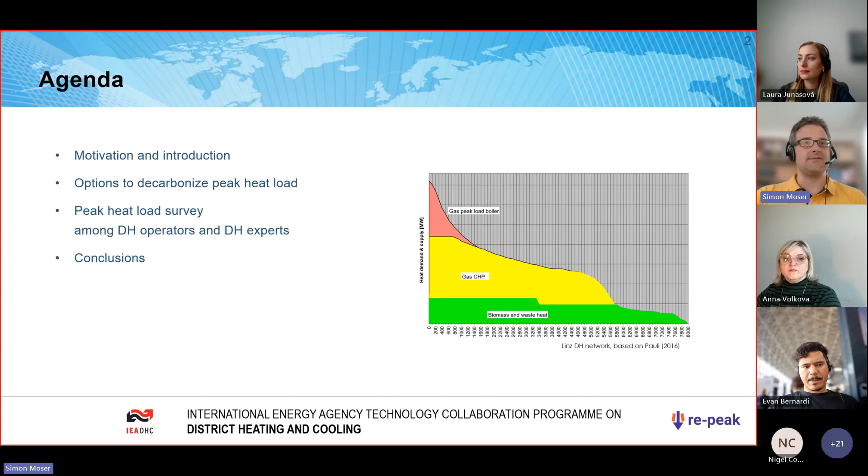REPEAK is a project that we performed in the context of IEA DHC Annex 14, and the long title is How to Cover Peak Heat Loads in District Heating Networks with Renewables. Here is a short agenda for the next 25 minutes. I will start with a brief motivation and introduction to the project. Then Anna will talk about the options to decarbonize peak heat loads, and then I will be back again and present on the survey among district heating operators and district heating experts and what we found out there.

Okay, for a brief introduction to the project. We know that many district heating networks already have incorporated CO2 neutral alternatives. Nevertheless, especially when you talk about decarbonization, it always seems like the focus is especially on the base load, while the rest is covered by gas.

So we had more or less two hypotheses, and one was that addressing peak heat loads is a major challenge for district heating networks because on the one hand, today they still primarily rely on fossil gas and oil, and on the other hand, it is about peak heat load capacity, which means that it's not for a large quantity of heat that is produced, but a large capacity that must be provided to really fulfill the heating requirements.

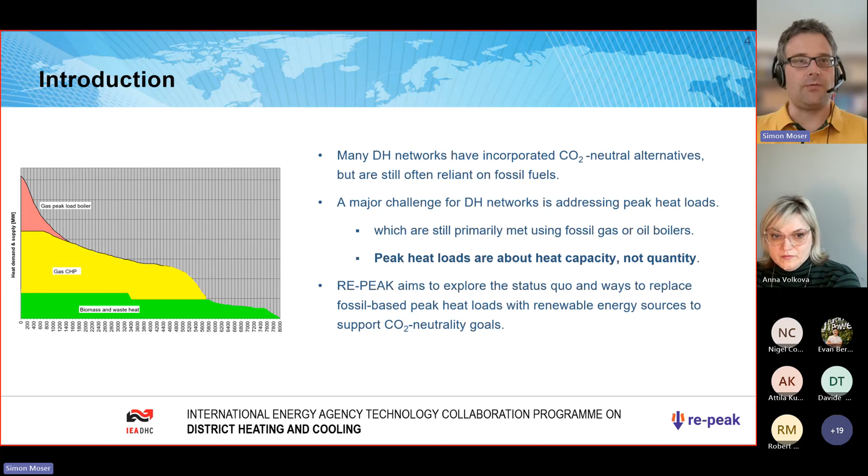And so REPEAK aims to explore the status today on the one hand and really derive what options are available for future peak heat load provision. So we have put up some hypotheses in the beginning, and these are also derived from a previous project that we have run, and they found, so to say, their way into the proposal.

And one hypothesis is that peak heat load lacks a precise definition, that peak heat loads are currently mainly provided by fossil technologies. Net zero provision of peak heat loads is not yet in the focus of district heating networks, and green gas is in the focus using the same technological basis, so green gas boilers then.

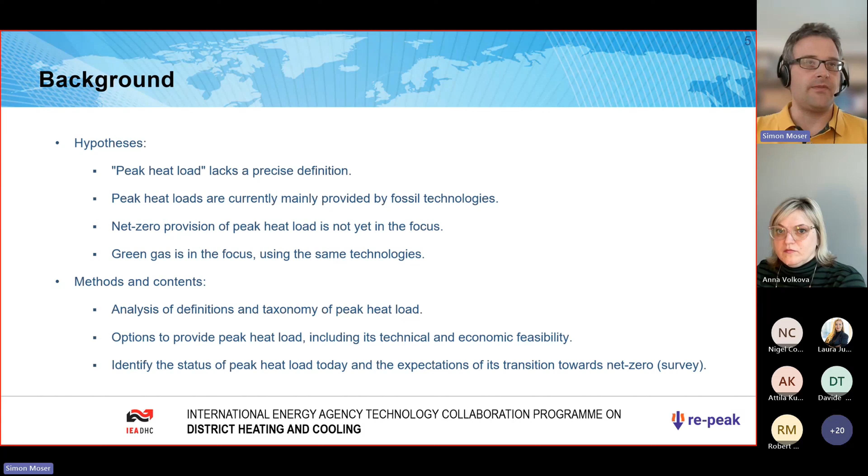What did we do, and what will you see in the following is the following methods and contents. We tried to analyze the definitions and the taxonomy of peak heat loads. We looked at the options to provide peak heat loads. That is what Anna will present, including the technical and economic feasibility. And then we identify the status of peak heat loads and the expectations towards the transition in direction of net zero from the survey that we performed.

This is done by the best project team suited for that, and this is Energieinstitut at Johannes Kepler University in Linz, Tallinn University of Technology, TalTech, and Euroheat and Power as a dissemination and promotion partner. The project is funded by IEA DHC within this Annex 14 call for proposals and runs since November 2023 and should come to an end rather soon in the next month.

And herewith I hand over to Anna, please. Yes, thank you. I will share my continuation of presentation. Just a moment. Yes. Just a moment. Do you see it now, or you see my screen? You see Teams? We see the Teams. Okay. Just a moment. This way. You should see screen. Perfect, now. Yes. But I will look a little bit to another direction now.

Dear colleagues, I'm very glad to participate in this meeting, and we'll continue with the presentation of results of our RE-PEAK project. And our task as partners was to develop a taxonomy of peak heat load. And when we started to work with this topic, with peak heat load of district heating, we understood that actually this topic is not so simple, and both definition and classification need to be analyzed, and that's why taxonomy as a method has been used to make this review analysis.

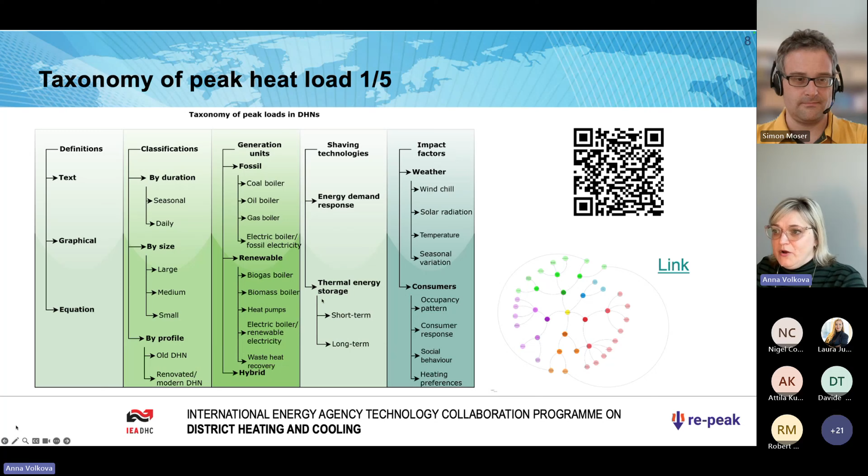So we started with definitions, and if you would speak with any district heating expert and ask what peak heat load means, first the expert will start drawing in the air or on paper.

So for sure, one possibility to define district heating peak heat load is a graphical definition, and here you can see examples. For sure, a text definition as maximum heat demand during a specific period, and another way of presenting what peak heat load means is with mathematical approaches using equations.

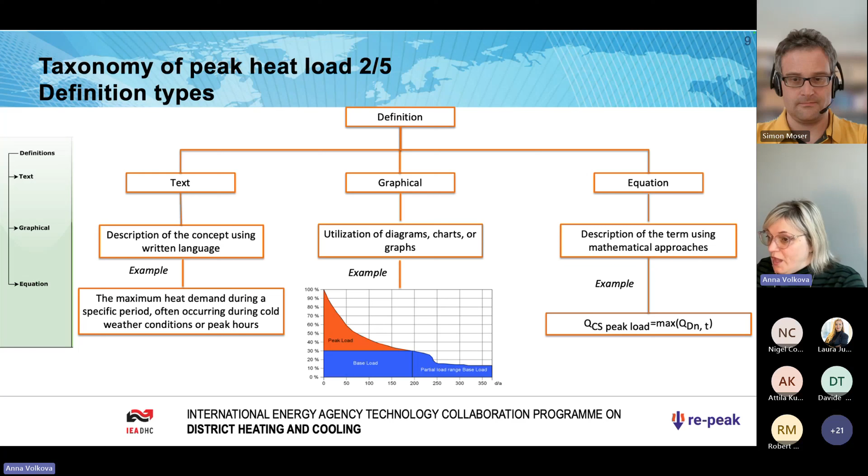So the main part of the taxonomy is categorization or classification, and we use classification and categorization by duration. So how long is the time when we have peak heat load in the district heating network? It can be daily or seasonal peak heat load. How frequently peak heat load occurs.

Another criterion for categorization is size of peak heat load, both if we look at the share of peak heat load in the district heating system, and another possibility is to look at the size of the district heating network. Small, medium, and large, and depending on need, the peak heat load profile can be different.

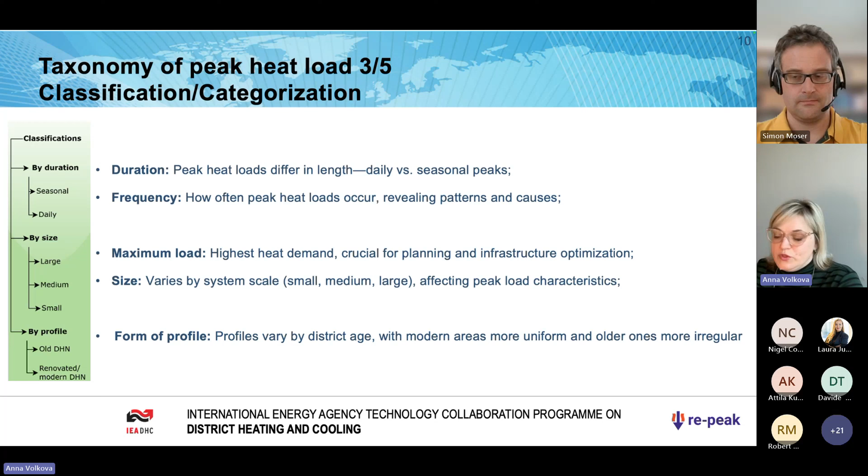And for sure, the form of the profile for the whole heat load duration curve influences the peak heat load profile, and it is different depending on the energy efficiency of the district heating network and the energy efficiency of consumers which are connected to this district heating network.

So what we added to the taxonomy was shaving technologies, including demand side management, thermal energy storage, and impacting factors, which for sure are related to forecasting of heat demand during all the year, but extremely important when we analyze peak heat load. And these can be found in our taxonomy.

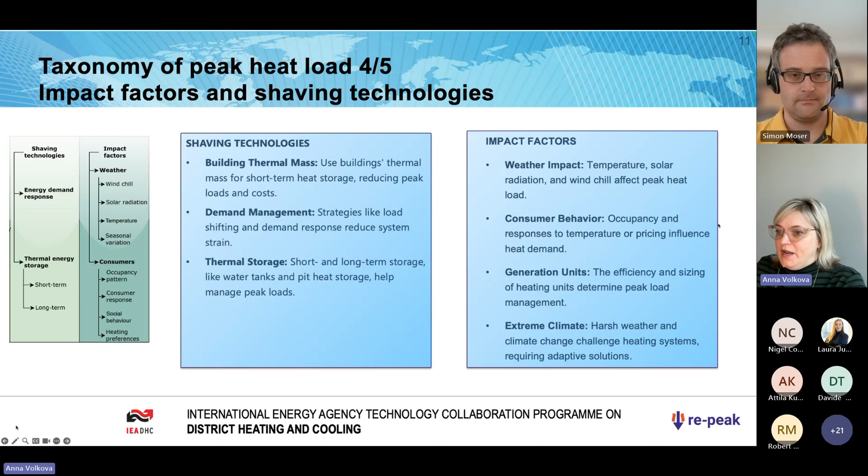And the main conclusion after we made this analysis using the taxonomy of peak heat load is that district heating peak heat load has been analyzed from different sides, and we identified widely used technologies, mostly fossil fuel based, as Simon mentioned, peak heat load covering generation technologies, and future potential technologies that can be used to cover peak heat load demand.

And as I mentioned, the impacting factors and shaving technologies have been analyzed.

Some equipment is moving here.

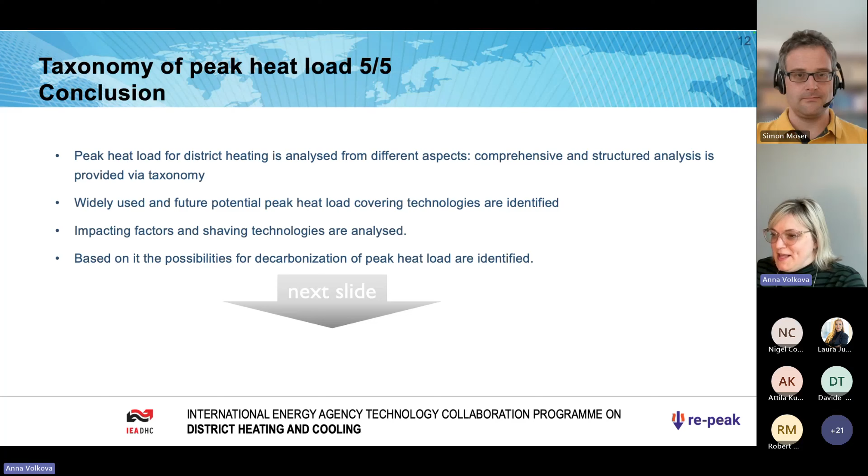Based on this, the possibilities for decarbonization of peak heat load have been identified, and more about it in the next slide. So there are two main options to decarbonize peak heat load. One of them, which is discussed a lot, is peak heat load management, including heat demand management and thermal energy storages, both local and large-scale, and synergy with individual heating solutions, which are often now added to our consumers.

And another option to decarbonize, and actually it was the focus of this project, is optimization of peak heat load covering technologies. So from an economical point of view, it is okay to have lower capital costs but higher operation costs compared to base heat load covering technologies, where it is preferable that operation costs should be lower.

And key parameters for technology selection are CO2 neutrality, fast start capability, required size or area or volume or depth, if we speak of boreholes, and minimum heat load for some technologies are critical when we determine suitable peak heat load covering technologies. And the key technologies which have been analyzed during our projects are electric boilers, heat pumps, and thermal energy storage technologies.

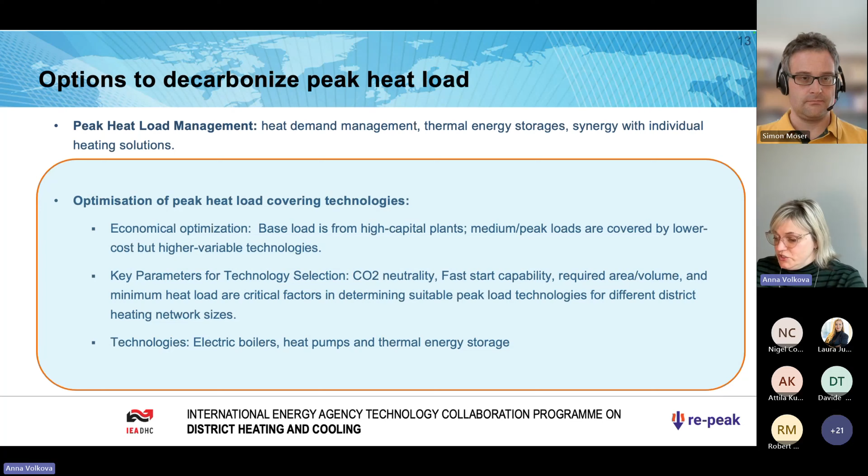And speaking about our technical analysis, based on the categorization which I mentioned before, we made the analysis for 4 types of district heating network peak heat loads. So they are grouped by size, large and small, and temperature or energy efficiency. So high temperature, which is low energy efficient district heating, like the existing traditional district heating network, and low temperature, more energy efficient district heating network.

And for these 4 types of peak heat load, we made 3 scenarios: when peak heat load is 10% of maximum capacity, 20% and 40%. Here you can see these scenarios, and we made the analysis for 3 technologies, which I mentioned before: electric boilers, heat pumps, biomass boilers. Yes, additionally, sorry, I didn't mention it, but we did it. And as a reference technology, a gas boiler has been used. And the main indicators for comparison were energy saving and emission reduction.

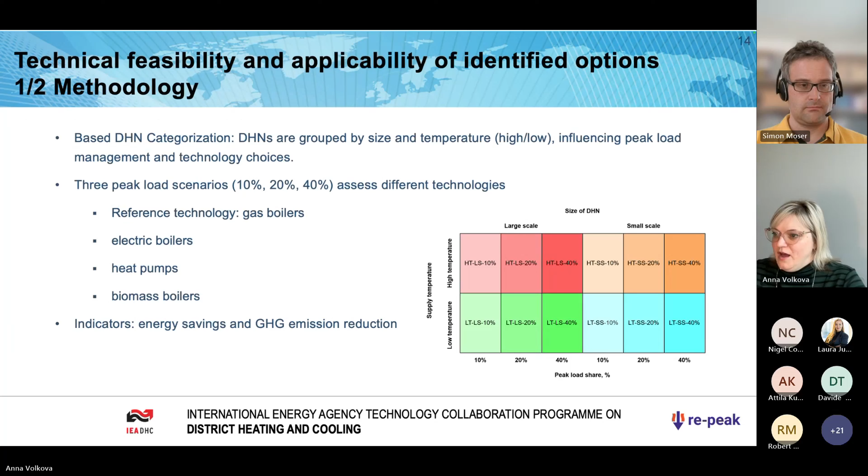And here you can see these 4 heat load curves according to these 4 scenarios: large scale high temperature, large scale low temperature, small scale high temperature, and here, sorry, mistake, and small scale low temperature.

And depending on this type of heat load curve and percent of maximum heat demand, the main difference is the peak heat load hours when we have this peak heat load. And here you can see these hours, what is the difference in it.

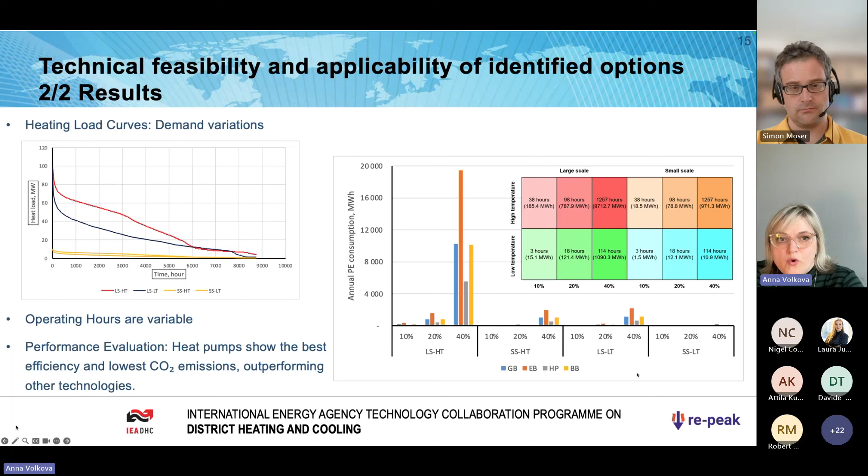And according to performance evaluation, primary energy consumption, from one side, heat pumps show the best efficiency and lower CO2 emissions comparing with other technologies. But here you can see, comparing according to primary energy efficiency, for different types of scenarios.

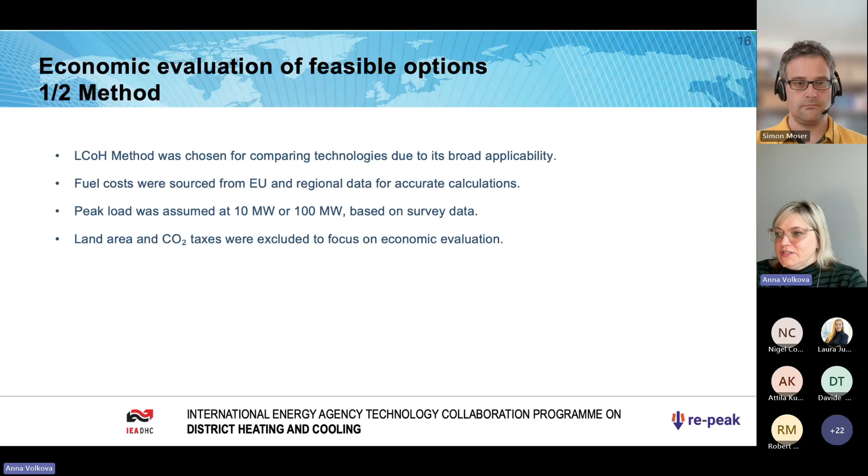And speaking about economic evaluation, the mostly used method, levelized cost of heat, has been used, and fuel costs were analyzed, sourced from different European and regional data, and two types of peak heat load were assumed, a little bit another approach. So for 10 megawatts and 100 megawatts capacity based on survey data, which Simon will speak about later. And we didn't take into account land area and CO2 taxes.

And here you can see economic evaluation of feasible solutions or feasible options, with two types of graphs for each technology. Here we have wood chip boiler, wood pellet boiler, heat pump, electric boiler, and gas boiler but with green hydrogen. The data for investment, which is most important for this case, has been taken from a Danish Energy Agency catalog and from a German catalog of energy technologies.

And you can see here, presented for three types of lengths, three types of time when peak heat load occurs. When it's 50 hours, yes, it means that we have a 10 megawatt situation and a 100 megawatt situation.

And of course, if the LCOH is divided over more hours per year, the relevance of the capital costs per kilowatt hour decreases, and therefore the lower light area is the cost for the 50-hour situation, and the upper is the other way around. Vice versa. The 50-hour situation is the upper darker area, and the light area is the 1,000-hour situation.

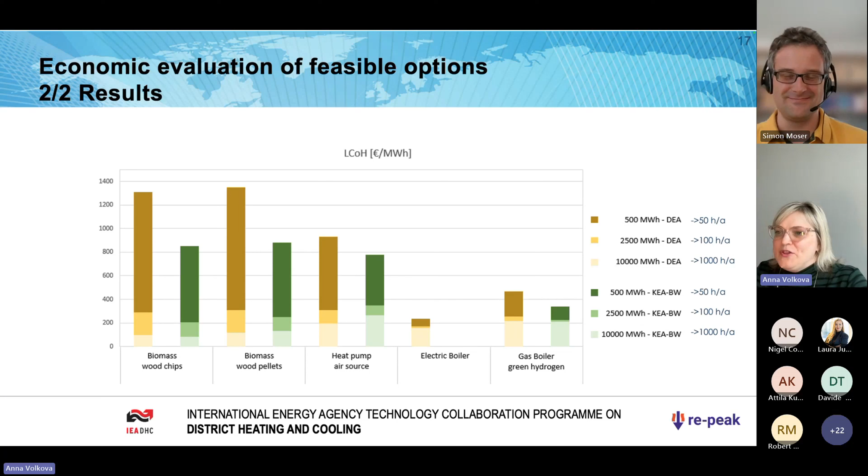Yes, I share my slides again. And you should see my slides again. Okay, I'm back. Yes, perfect, thank you.

So part 3 is the results of the survey that we did among district heating operators and district heating network experts. And here are the methods that we applied.

So first, we had an early version of the questionnaire, which was drastically refined based on the feedback from the experts in some feedback loops, and also within the consortium. And we tried to reach two types of respondents.

On the one hand, we tried to reach district heating networks, which is an important differentiation because it's not the operators, but if an operator operates more than one network, he or she was very welcome to answer the questions for different networks.

And on the other hand, we wanted to have the feedback from district heating experts. And for both situations, we used a mix of closed and open-ended questions, together providing qualitative but also quantitative insights. We ran the survey in spring, so to say March to June approximately 2024. It was an online survey promoted internationally, especially from our dissemination partner Euroheat and Power.

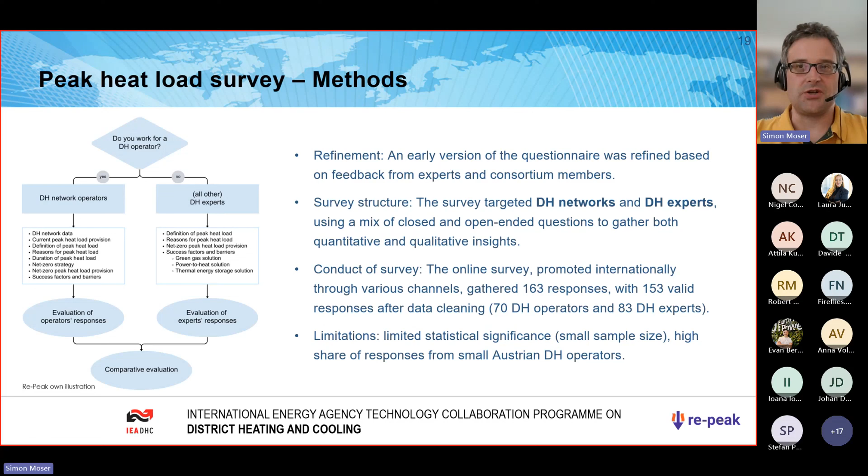And another thing is that there was a high share of responses from smaller Austrian district heating operators, which I would approximate at approximately 20% of the responses, and that means that there could be a bias towards especially biomass and of course especially regarding boiler answers.

Again, be aware of maybe a small bias here by Austrian biomass networks. We especially see, looking for example at the Danish responses, that temperatures are lower than that.

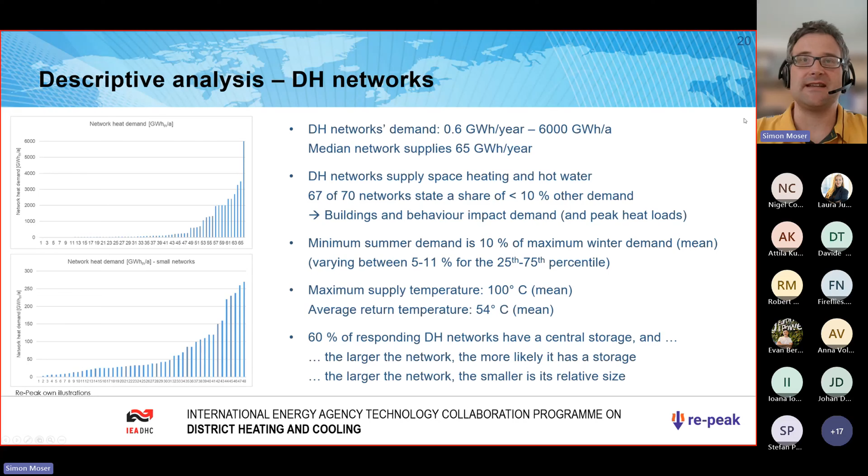There was more than one choice possible, but especially when you are aware that there are combinations possible, it definitely means that in most cases fossil fuel fired boilers are the basis for providing peak heat loads.

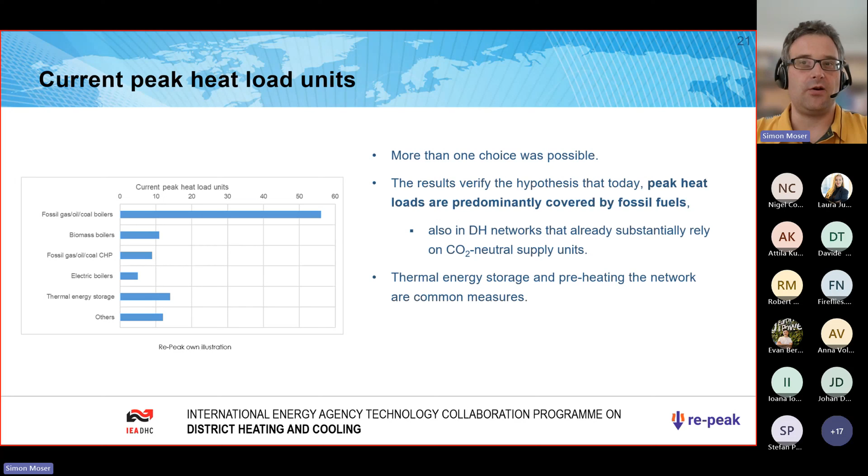Thermal energy storage and preheating the network are very common measures and are often mentioned also in the additional comments from the responses.

Then there is also another important finding. We see that district heating operators and district heating experts equally define peak heat loads to be the peak demand in a certain period, or the load exceeding a certain threshold. So we see that the definition is more or less shared into the two groups, and the definition is not unambiguous.

It's, yes, depending on situations, so to say, and it depends very much on what you are probably currently talking about. We also asked where do the peak heat loads come from, and we see that daily peaks are important, like winter mornings especially and winter evenings, but also the coldest season in winter, which are some days or weeks, is another source of peak heat load demand.

So there are also two types of peak heat loads: a demand that occurs for some hours, and another demand that occurs for some days and weeks.

And given this diversity of peak heat load definitions, the district heating network responses also range from 10 hours peak heat load per year to 1,250 hours per year, with a median of 200 hours and a mean of 350 hours of peak heat load.

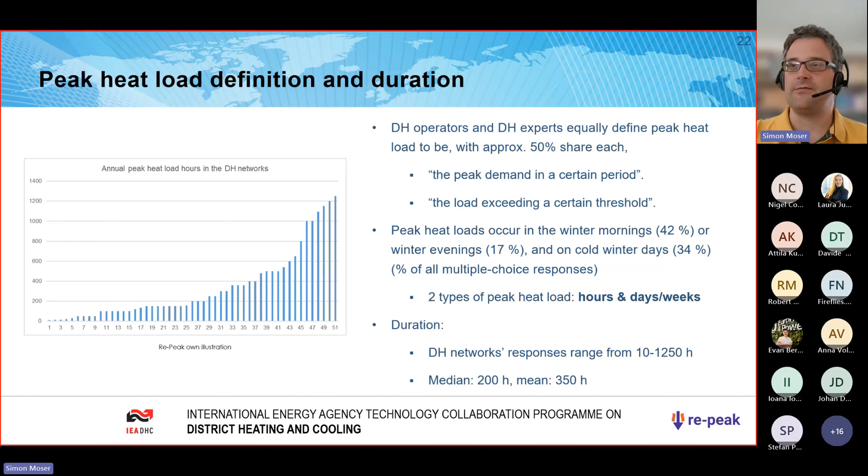But that definitely also makes a big difference, especially when we talk about the choice of how to cover peak heat loads ideally and what option to choose, because when you have 10 hours, the answer is probably different from the situation when you have 1,250 hours.

What do the district heating operators perceive as the optimal choice for their specific networks? Here again, multiple choices were allowed, and therefore also combinations were allowed.

And you can clearly see that there is a really wide distribution of technologies. So there are some that are definitely answered more often, more regularly than others. But on the other hand, a clear winner is not really visible there.

This means that we have a wide distribution of technologies and a high share of responses that combine technologies. Combining technologies means, on the one hand, to not rely on one energy carrier, for example, but also means, so to say, covering lower peak load hours and higher peak load hours with two distinctive technologies.

Thermal energy storage is the most mentioned option and occurs almost exclusively in combination, most often together with heat pumps. When it is about units that really generate heat, it's electric boilers, heat pumps, biomass boilers, and green gas boilers, and not too far behind also biofuel boilers, which should be responsible for achieving peak heat loads.

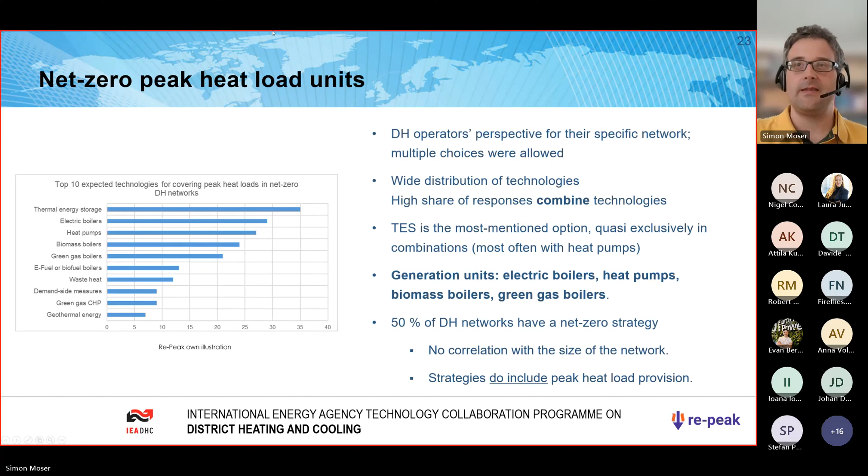What are the advantages of the choice you made as a district heating network operator was another question. What are the advantages, what are the disadvantages, and here are the interpretations: any choice is an expensive investment, especially regarding the volume of energy.

The CapEx, capital expenditures, remain the challenge of peak heat loads—they are the most important barrier. OpEx, especially the price of the energy, is allowed for peak heat loads as it runs only a few hours per year, but still this is some very expensive thing.

What we also see, and what is probably most important, is that when strategies are defined today, district heating operators select existing and proven technologies, not something that is expected to happen. So district heating experts tend to believe in future developments much more in contrast to the district heating operators—they refer much more often to, for example, green gas or demand side management.

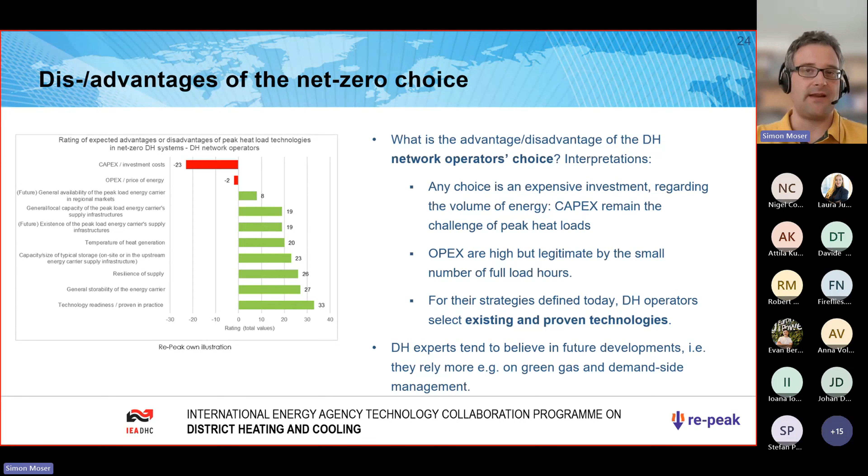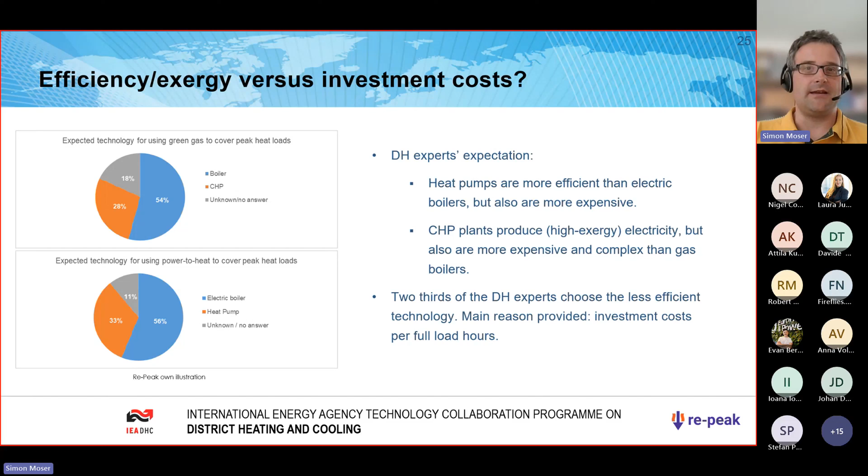We've also asked, as you all know, heat pumps and CHP are probably a more energy or exergy efficient choice than the boiler solution, and we asked what the experts expect to be chosen in the future. Two-thirds of the experts chose the boiler technology, with the primary reason provided that the investment costs are too high given the number of full load hours.

And so we here are at the conclusions. We see that the definition of peak heat loads in district heating networks remains intangible. We do not propose a separate or new definition, but we note that we must be aware of what we are currently talking about.

Is it a short-term peak heat load? Is it a weekly, daily peak heat load? And then discuss in a more focused way. In most cases today, I think this is proven, peak heat loads are provided by fossil-based units.

We see that peak heat loads are in the focus of district heating network operators' strategies and expectations. For those who do not have a strategy, they rely on existing and proven technologies, which primarily is thermal energy storage, electric boilers, heat pumps, biomass boilers, and green gas and also green oil boilers—many of them, as mentioned before, in combination with each other.

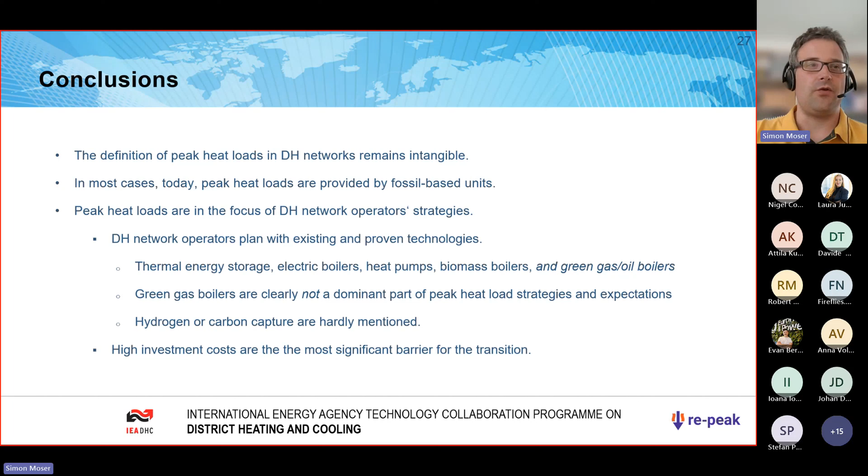So green gas boilers are clearly not the sole or dominant part of peak heat load strategies and expectations—another hypothesis that can be rejected at that point. We also see that hydrogen and carbon capture technologies are hardly mentioned. High investment costs are the most significant barrier for the transition of peak heat loads.

What is the outlook? What are the next steps? We finalize the report in the next days or weeks, and then we submit it to IEA DHC, where a revision will happen, and we think that in summer 2025 the final report should be available. So in the name of the team, I thank you for listening, and I'm happy to answer any questions afterwards.